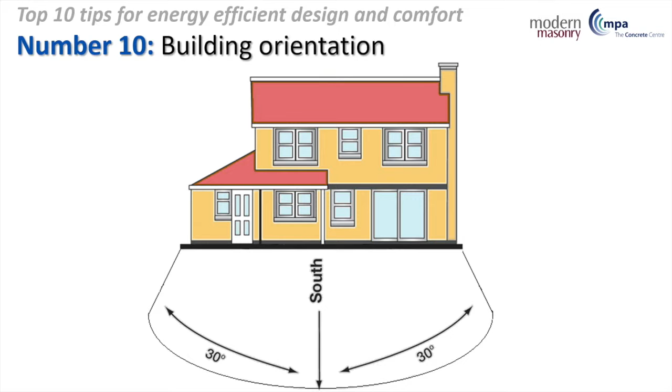Anyway, on to my first point, which is building orientation. It's not something designers, developers and architects are always able to control and influence, but if you can, it makes really good sense to orientate dwellings on a north-south axis. There's a lot of good reasons for doing that, which will become more apparent as I carry on. Essentially, it gives you a really good standard of daylighting, it avoids glare, it provides passive solar gains during the heating season, and it makes shading very straightforward. You'll see why shortly.

So following directly on from that, if we have a north-south orientation, what we want to try and do is have a 2-to-1 ratio in terms of glazed area. So we want roughly twice the amount of glazing on the south elevation than on the north. The reason for that is that on the north elevation, windows actually have a net heat loss over the course of the year. So really you want windows just big enough to meet your daylighting requirements, but nothing more than that. On the south elevation, we want to optimise the glazing to get as much solar gain as we can during the heating season without inadvertently leading to overheating problems in the summer. So on this example of an ordinary detached house, we probably want about 13 metres squared on the south elevation and about half that on the north.

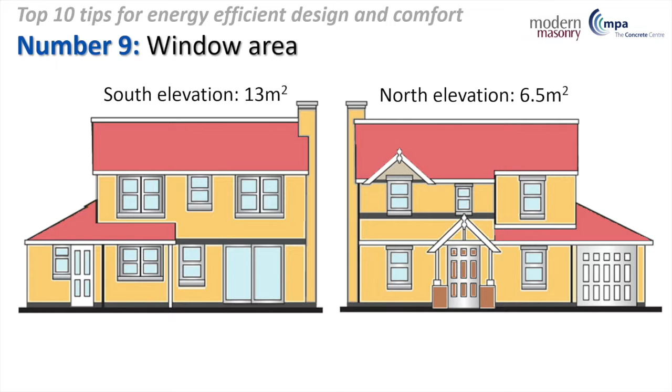Now the other point just to make before I move on is that this is the essence of passive solar design. It's about window design and orientation, and this dwelling has been optimised to take advantage of that, and it looks conventional. So passive solar design doesn't mean you need an unorthodox or unconventional appearance to your building.

You'll see that all of these points are linked, they all work together. So at number 8, we've got solar shading. On our south elevation, shading is very straightforward because we can do it with an overhang, could be a balcony, brise soleil, an awning, or maybe just a deep overhang on the roof for the first floor.

That will keep out the high angle summer sun but won't block the winter sun. So shading's very easy. Now on the east-west elevations, it's a little more tricky. We can't use an overhang, it's not going to keep out the low angle sun in the east in the morning and in the west in the evening, so we're going to have to use shutters or blinds. Actually external shutters is one of the best options you can use, and it's not popular in the UK. You see them used widely in mainland Europe, but not in the UK. I think that's probably set to change in the next few years because we're going to get much tougher legislation on overheating and on ventilation as well in the summer. External shutters are brilliant because not only do they keep the sun out, they provide a means of secure ventilation as well. Depending on the design, they can also reduce heat loss during the heating season if you keep them shut at night. It's always a good idea to have your shading on the outside of the building as well if you can, that's where it's most effective. So, as I say, probably see more external shutters in the UK in the future.

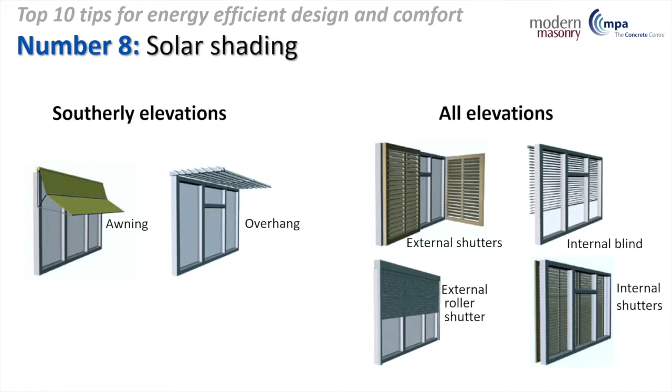Just to make the point about how effective overhangs are at keeping out the summer sun, this is a quick simulation in Google SketchUp, which is a very useful tool because it allows you to look at sun paths and shading. You can specify where in the UK your building is, the orientation, the time of day, the time of year, and see what actually happens.

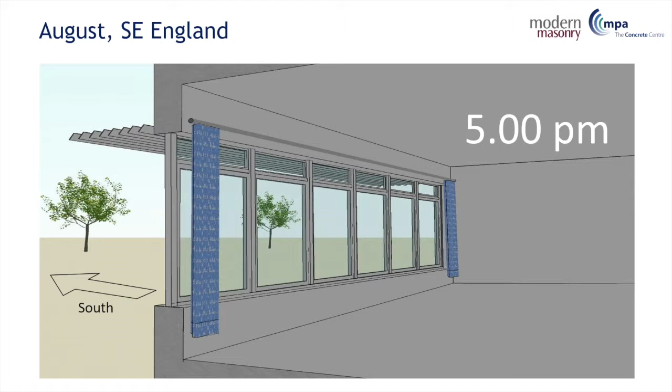So this is a south-facing room with south-facing windows. We've got a brise soleil overhang. It's 7 o'clock in the morning, and as we go through the day, you'll see it's doing a pretty good job of keeping out that high angle summer sun and helping to prevent overheating problems. In a minute I'll show you this model again, but on a day in the heating season.

Okay, number 7 is ventilation, or summertime ventilation. When we talk about ventilation at the moment, it's nearly always in the context of the heating season and trying to have a minimal amount of ventilation. You've got just enough for occupant needs and no more, because you don't want excess heat loss. That's fine, but we don't necessarily give enough attention to summertime ventilation, where we need much larger volumes of air to keep the building cool.

These are just a couple of really effective techniques that you may be familiar with. So we've got cross ventilation, where you've got openings on opposite sides of the building, and the wind can blow directly from one side to the other. You just need to make sure that air path is not obstructed, and you can get very high air change rates with this. It's probably the best option to go for summertime ventilation.

Stack ventilation on the right works when the wind isn't blowing, or maybe in locations where you have low wind speeds, relying on the natural buoyancy of warm air to get air through the building. So the way it works is you've got low-level openings that allow cool air in, particularly at night, so you keep those open at night. That cool air picks up heat inside the building, drawing heat out of the fabric, and as it does so, the temperature of the air increases, it becomes more buoyant, and it rises up to the top of the building. You need to design the building so it can go from one floor to another.

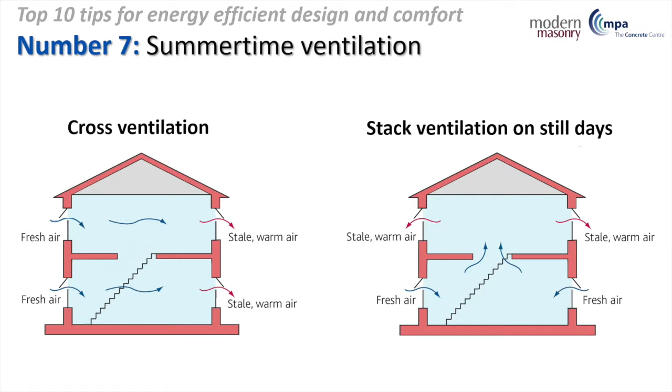So that's all well and good, but one of the issues we're going to have to contend with going forward is security. There's been a very recent change to the SAP overheating assessment, which is the compliance tool for the building regs. In the past, when doing your SAP assessment for overheating, you were able to just assume windows could be left open to get large volumes of air. Can't do that anymore - you have to look at the local environment and do an assessment to see if there's a potential security issue and also a noise issue.

And if there is an issue and you don't do anything about it in terms of ventilation, you have to assume you've only got trickle vents for your summertime ventilation, which of course is not going to work - you'll fail the test straight away. So we're going to have to give a lot more thought to how we provide summertime ventilation.

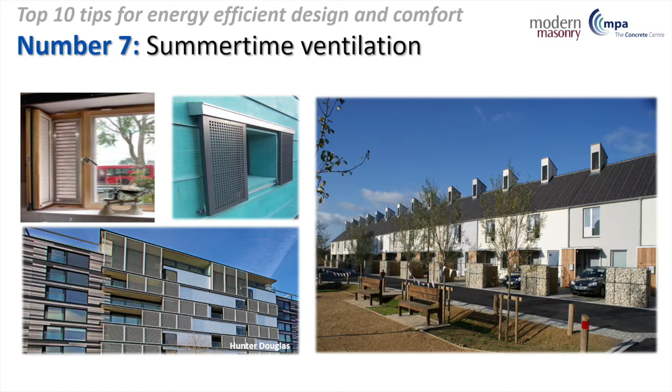Okay, number 6: use of thermal mass. Thermal mass is a property of medium and heavyweight materials, so you'll find it in masonry, concrete, and stone. If you're not familiar with it, it basically describes the ability of these materials to absorb heat, hold onto it, and then release it later in the day. It's a very effective way of helping to prevent overheating in hot conditions, because it soaks up unwanted heat inside the building and helps stabilize the internal temperature.

But you do have to get rid of that accumulated heat, and you do it at night using the cool nighttime air to draw heat back out of the fabric, cooling it down so the next day it's ready once again to provide a lovely radiant cooling effect.

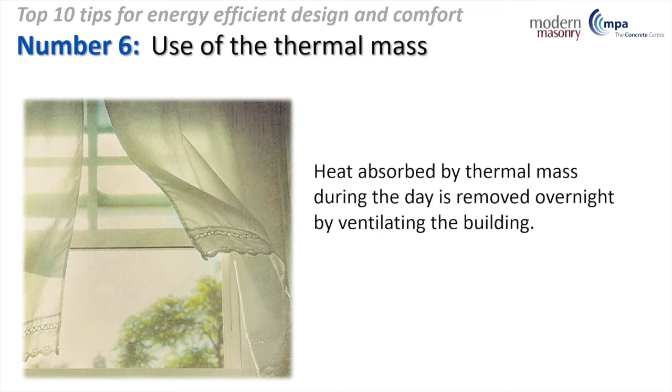So what are the key sources of thermal mass in a dwelling? You can see them in this cutaway. You can have a concrete upper floor as an alternative to a timber upper floor, and I've put on this slide the K values for each of these building elements - briefly, that's the measure of thermal mass used in SAP and SBEM, the compliance tools for Part L. With a concrete upper floor, you've got a K value of between 40 and about 160, depending on the type of floor and finish. Just to put that into context, a timber upper floor will have a K value of about 18 kilojoules per metre squared.

There's lots of thermal mass in blockwork partitions, between about 39 and 111. Similarly in cavity walls, loads of thermal mass in the inner leaf of blockwork, getting up to 190 kilojoules. With timber frame external walls, you've only got the thermal mass of the inner leaf of plasterboard, so you have about 9 kilojoules - quite a bit less.

One thing to mention: people think that if you dry line the walls, that will kill the thermal mass, and it certainly reduces it, but not to the extent you might think. If you actually compare the K value of a dry lined masonry wall with a wet plaster one, it's only about 20% less, so it's not huge.

There's lots of thermal mass in concrete ground floors as well, particularly if you tile them, which not only adds to the thermal mass, but will conduct heat to and from the screed or slab underneath very freely, which is a good property.

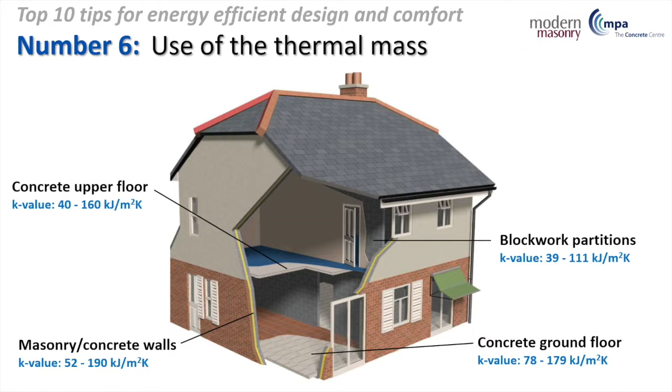So back to that simulation. Same room, but now it's a day in February, so we're in the heating season. It's 8 o'clock in the morning, and the low angle sun is already shining underneath the overhang and onto the side wall there. So if you've got a bit of thermal mass in that wall, it's going to be absorbing the free passive solar gains and holding onto those. And then we'll just go through the day.

And you can see the sun tracks round onto the floor again. If it's a heavyweight floor, it's holding on to some of those solar gains. And then by about 4 o'clock, the sun's gone down and it's all over.

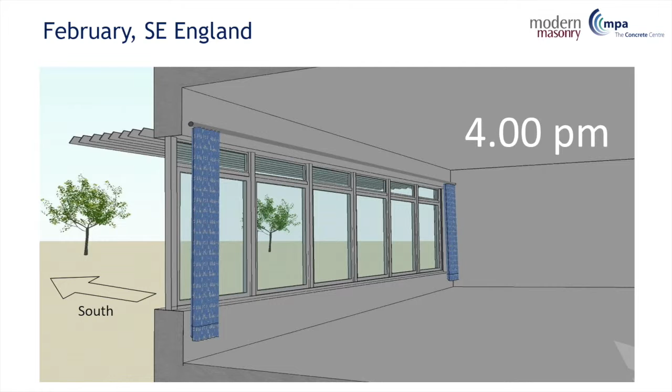And then what happens is the air temperature drops and some of the heat stored in the fabric is re-radiated back into the room. And that can actually reduce the load on your heating system by around 11%. Doesn't sound massive, but over the lifetime of the building, that will add up.

And you have to also remember that it's not really adding anything to the cost of the design. It doesn't require any user interaction. It doesn't require any maintenance. So it's going to be doing this for the life of the building. And if it's a masonry building, I would argue it's going to be around for a very long time.

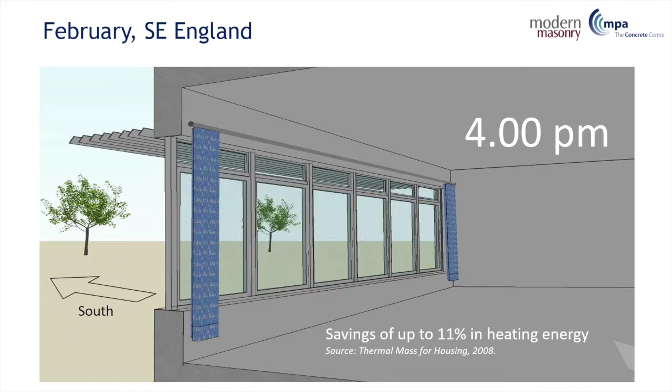Just finally on thermal mass, we often get asked where should it be located, and it's a very easy question to answer because essentially it has to be exposed to the inside of the building. So if you've got a cavity wall, which you can see at the top, that's fine. You've got that inner leaf of blockwork, so that can absorb and release heat gains.

Solid masonry construction in the middle, again, that's fine because it's good practice to put the insulation on the outside of the building, so you've got all the mass of those nice thick blocks. What you don't want to do is to insulate internally if you can avoid that, because it isolates the thermal mass. So from a thermal mass perspective, something like insulated plasterboard is not great.

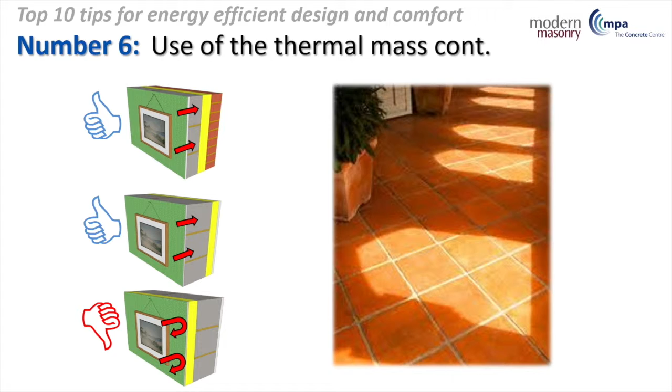Same rule for ground floors. As I said, tiles are brilliant. They will conduct heat to and from the screed and the slab below freely, and also add a little bit of thermal mass as well.

So number 5, efficient heating, and I'm just going to carry on with the theme of ground floors for a moment. You can see here a cutaway of a heavyweight ground floor with a wet underfloor heating system. And in this example, the insulation is underneath the concrete slab. Now that's not particularly conventional, but there's absolutely nothing to stop you doing that.

And if you really want to max out on the thermal mass, that's the place to put it, because you've got all the mass of the slab, the screed, and the tiles. The only downside is you get a very slow response time in terms of heating controls. But that doesn't really matter in reality, because with this arrangement you really want the heating on all the time at very low level, just in the background. That's a very efficient form of heating.

And the reason why it's particularly efficient is because if it's linked to a condensing boiler, so that's supplying your underfloor heating system, it will be able to operate in condensing mode for very long periods of time, which is when it's most efficient. The reason being, without getting too technical, the flow and return temperature to the floor can be about 10 degrees lower than would otherwise be the case in a lightweight floor. And condensing boilers love that, so that 10 degree reduction will improve the performance by about 5%. Again, doesn't sound huge, but over the life of the system that will add up.

But perhaps more importantly, if we're using a heat pump instead of a condensing boiler, which we will be in the future, we're going to be moving over to heat pumps, that 10 degree reduction in flow and return temperature will give you about a 20% uplift in performance of your heat pump. They are very sensitive to flow and return temperature. So I would argue this is a very good arrangement if you want an efficient heating system.

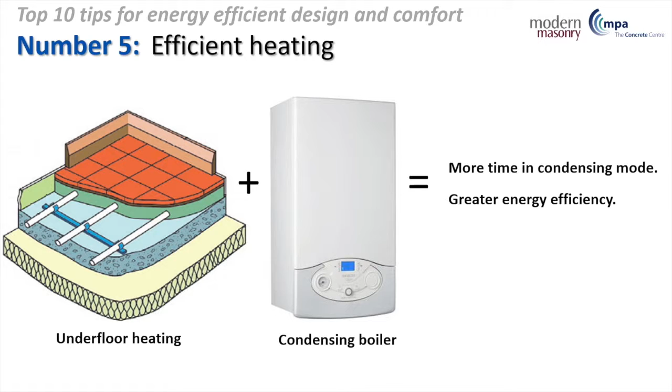Oh, actually, just one other point, just before I move on. The other thing with heat pumps is they're electrically driven. We're all getting smart meters now. We're going to get real-time energy pricing in homes, and soon we'll be able to switch on the heat pump when electricity is cheap, store the heat in the floor, take advantage of that later, so we'll save on our heating bills, and we'll also be doing the whole of the UK a good service because we'll be making greater use of renewable energy when it's abundant, because we can use it when we don't actually need it and store it in the floor.

Okay, number 4, airtight construction. Goes without saying, we don't want too many gaps and cracks in our homes and buildings.

The thing I want to say about this is that in 2006 we had to start pressure testing new homes. It came into the building regs then, so it was mandatory. And what we found initially was that timber frame homes were performing slightly better than masonry homes.

And the reason for that was that they have a vapour barrier, which also, as it turned out, acted quite well as an air barrier. However, since then we've learnt lessons on how to design masonry homes and build them as well to ensure they're airtight, and today they're as airtight as any other form of construction, so it's not an issue anymore. And in fact, if you look at NHBC pressure testing statistics, it's masonry homes that are the most airtight, which is quite interesting.

Now, one other thing to mention on airtightness is it's all very well passing the test when the building's new, but you do need to maintain airtightness over the life of the building. And the NHBC Foundation did some research a few years ago to see how well new homes performed when they were sort of 4 or 5 years old.

So they went back and retested them, compared the results with the original pressure testing results. It was a fairly small sample, but what they found was it was the masonry homes that were maintaining a high standard of airtightness. It wasn't degrading as rapidly as the other methods of construction. So that was good news.

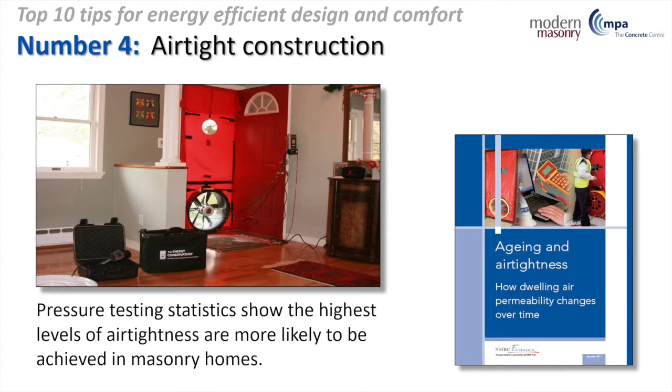And I mentioned wet plaster finishes earlier, great for thermal mass, also brilliant as an air barrier, very effective, very robust, and the brilliant thing about it as well is that unlike other air barriers, you can actually see it, so if it becomes damaged, you can repair it. So it'll maintain its integrity over the life of the building.

Okay, number 3, minimising thermal bridging. Of course, the thermal bridge is anything that crosses or spans your layer of insulation and is a source of heat loss. And if you look at the SAP assessment tool, there's a little box you can tick for the default thermal bridging value.

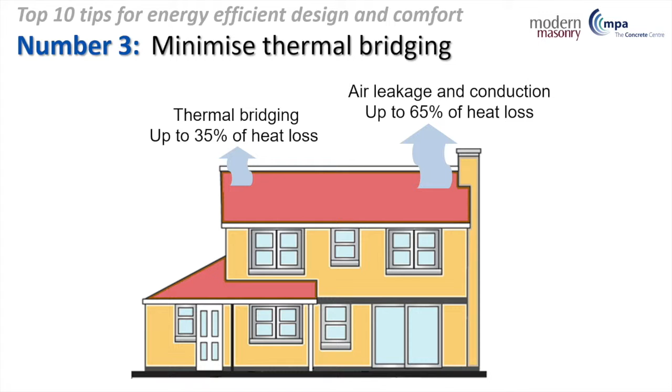This is a very tempting thing to do because then you can just move on, it saves time. But you'll pay a very high price for that because SAP will assume up to 35% of the heat loss from your dwelling comes from thermal bridging. So much better to take a little bit of time and trouble to specify the individual thermal bridges, and you'll get a much better result.

And the masonry sector has produced a comprehensive set of high-performance construction details which are free to download and use. We've got details for aggregate blocks, get those from the CBA website. Details for aircrete blocks, get those from the Constructive Details website. Or alternatively, you can just go to the LABC website and you'll find all of them there, not only for cavity wall construction, but also for solid masonry. So I do recommend, if you're building in masonry, you use those.

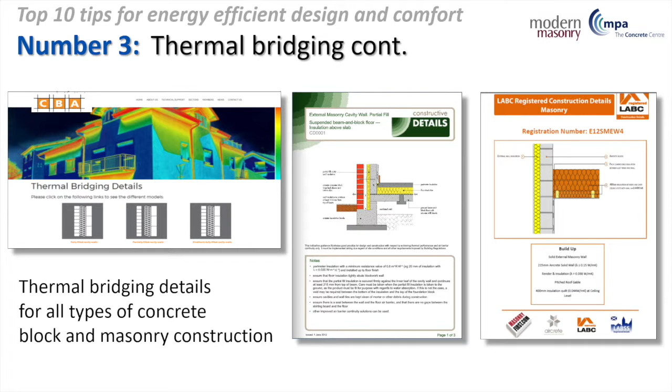It's a very cost-effective way of maximising thermal efficiency. And if you do, you'll go from about 35% with that default thermal bridging value down to about 14. So it's a bit of a no-brainer, really.

And we've also got loads of relatively new high-performance ancillary products for masonry construction that reduce thermal bridging. So we've got insulated cavity closers made from plastic with a polystyrene core. You just cut them to size and they slot together, very easy to use. And they'll take the weight of a triple glazed window unit, which you can sit on the cavity closer, which is, from a thermal efficiency point of view, the best place to put it.

We've got high performance lintels from companies like Keystone, give you very low Psi values. We've got high performance wall ties now, and you can see both of these examples on the Ancon stand, which is just over there behind you. And they produce basalt fibre ties, which is the black one at the bottom. They're made from the basalt mineral mixed with an epoxy resin, and they essentially don't conduct any heat at all. You don't even have to enter their details in your U-value calculation. They're that good.

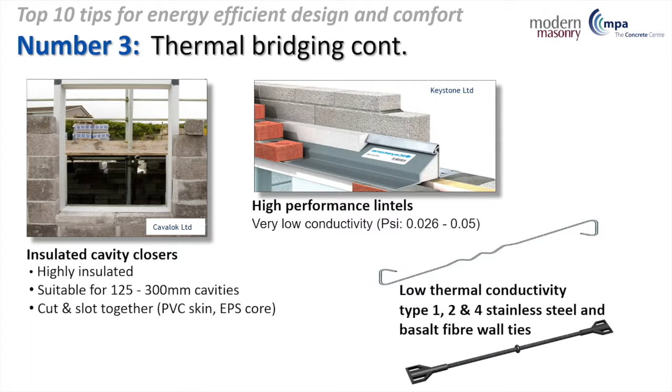You pay a little bit of a premium for those, but you can still use wire ties like the one shown there. The only thing I'd say is we've got really good ones now for larger cavities. So for 150mm cavities, you can now get a Type 4 wall tie, and the significance is that a Type 4 tie is very thin and conducts virtually no heat. Couldn't get those a few years ago - you'd have had to use a really thick, chunky tie that would have lost you loads of heat. Not the case anymore.

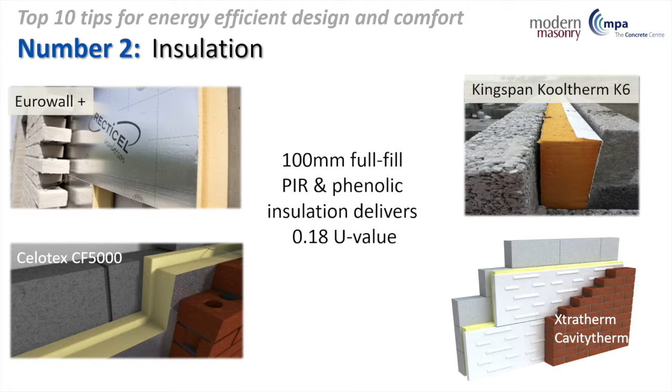Number 2, insulation - the more the better, of course. What I want to say about insulation in respect of masonry construction is that a few years ago it was thought you might need walls half a metre thick to get the U values required for zero carbon homes. Hasn't turned out to be the case at all. We've had really high performance insulation products come onto the market that will give you a U value of about 0.18, which is excellent, good enough for Part L, in a standard 100mm cavity. So no need for really wide cavities if you don't want them. You do pay a bit more for these, but you can get the same performance with more conventional options, albeit in a wider cavity of 150mm - that could be partial fill or full fill mineral wool insulation, which is the cheapest option of all.

Just before I move on, I want to mention beam and polystyrene block ground floors, which are very popular these days. This is where you use polystyrene blocks to infill between your concrete beams instead of concrete blocks. They provide insulation, but also reduce the overall floor depth, so you don't have to remove so much soil from site. There are products available now that can give you fantastically low U values of 0.09, way better than you need for Part L. I just wanted to make you aware of that.

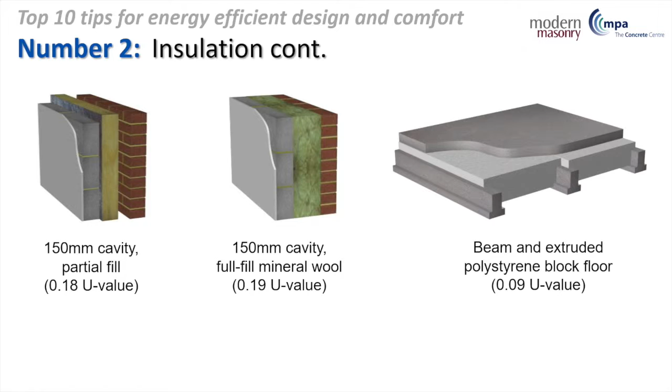At number 1, perhaps controversially, but I think the most important thing is to make sure the home is resilient and durable, because there's no point maximising fabric energy efficiency if the home itself isn't fundamentally durable. By resilient, I mean resilient to the effects of climate change - overheating, which I spoke about, and effects of flooding, so you need flood resilient materials. Durable - masonry and concrete is extremely durable. It also protects the thermal performance in that the insulation in the cavity is well protected. I mentioned wet plaster as your air barrier - very robust, and as I said, you can fix it easily. So I think this should be number 1: make sure buildings are durable, and people don't really talk about that much at the moment. I wanted to bring that to your attention.

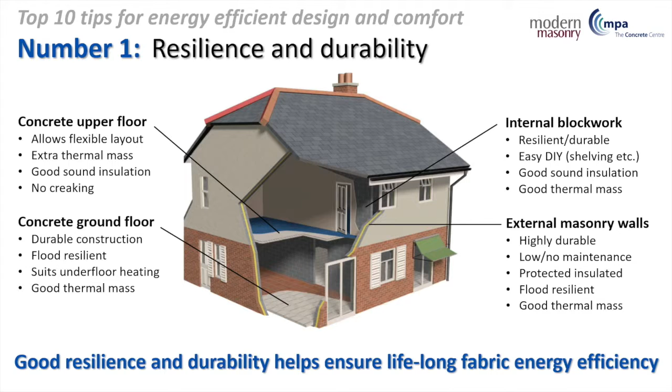I think I've still got a few minutes, so I wanted to go back to a point I raised earlier and go into a bit more detail, which is summertime ventilation and this new requirement to think about acoustics and security issues. I mentioned security, and I was going to talk a little about acoustics - I've borrowed a few slides from a CIBSE webinar I saw last year, which was really useful, by a chap called Jack Harvie-Clark and Anthony Chilton. Basically they were talking about a new assessment methodology for considering acoustic performance in the overheating condition.

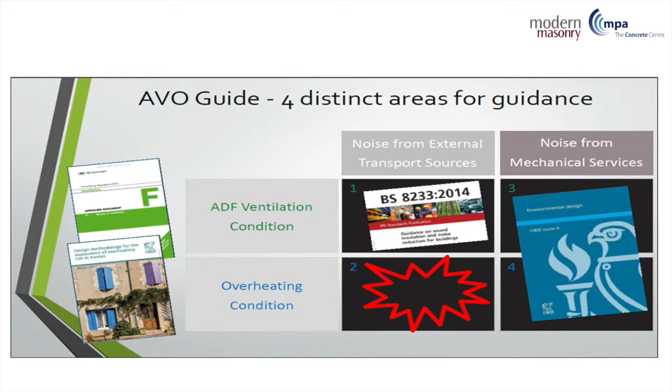What I mean is they've identified there's plenty of guidance on dealing with acoustics from mechanical services - CIBSE published guidance on that. There's a British standard on dealing with acoustics through facades, but there's nothing on dealing with acoustics where you've got windows that are open, so in the overheating condition. So they've come up with a very simple 2-step test you can apply, and I'll just take you through it - a 2-level assessment procedure.

Level 1, what you have to do is go to site and do a sound level assessment both during the day and at night. Come up with your average values, and then knock off from those values 12 decibels, which represents the difference between the outside noise level and the inside when you've got a window that's wide open.

So it's sort of a worst case scenario. And if in that worst case scenario you still come in under 50 dB during the day, 43 at night, then you've passed the level 1 assessment and you don't need to do any more. You can just ventilate your building with windows that are open, assuming, of course, you haven't got a security issue.

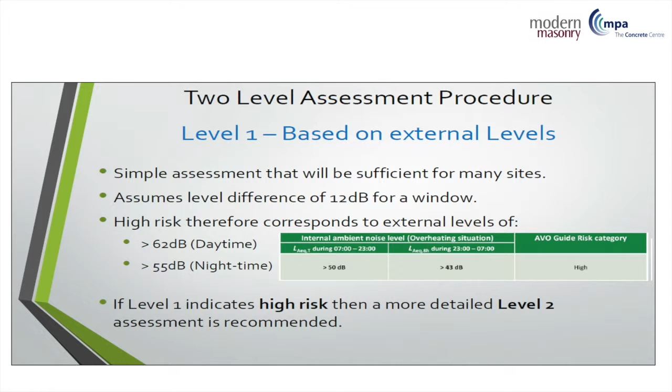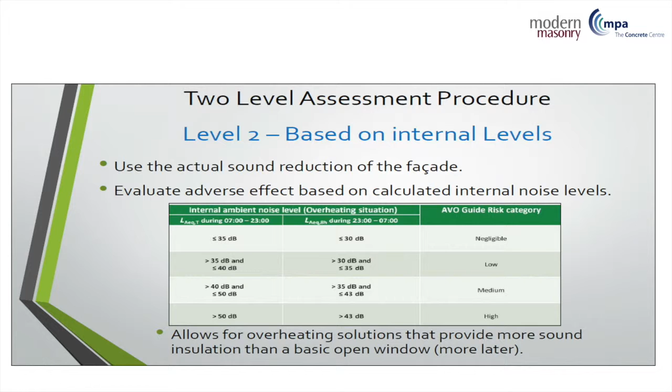If you fail it, then you've got to go into a bit more effort with your design. On this table, you can see that high level again at the bottom, the 43 and the 50 dB, and then you've got the other levels for medium, low, and negligible. Now, we've already established that the open window is not going to work, so we've got to think about using some other approach, and here are some options.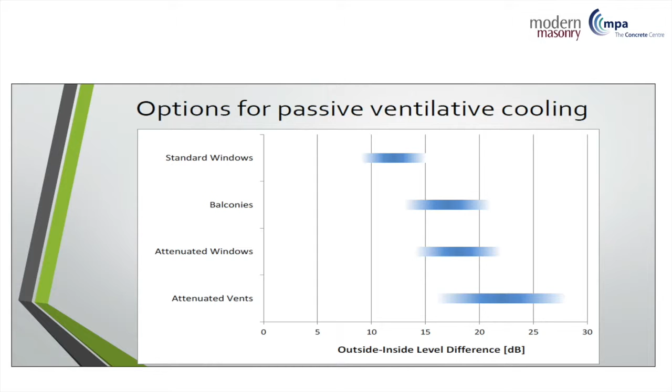At the top, you can see your standard open window and the 12 dB reduction. Then we've got things like balconies—acoustic balconies will give you a greater sound reduction. Attenuated windows and attenuated vents are the best of all, so you might want to apply one of those. This is what they look like: attenuated windows and vents basically provide an indirect path for the air and for the sound as well.

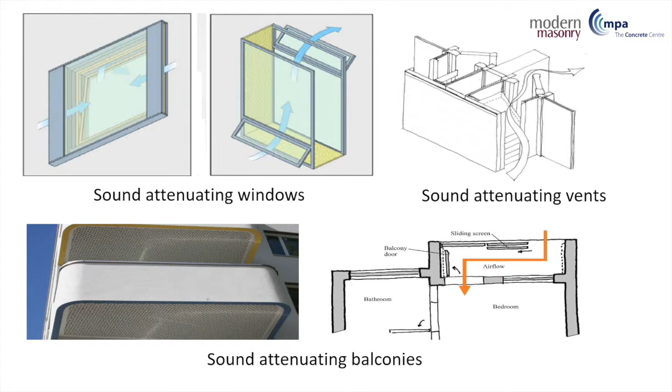Here's a very quick case study just to finish off. This is St John's Hill in Clapham, a residential development. They did this assessment on the development, and what they found was with the level 1 assessment they failed it at night. So with an open window, it wasn't enough—we still got 48 dBA inside the building, which is higher than the 43 dBA limit. So open all windows, no good.

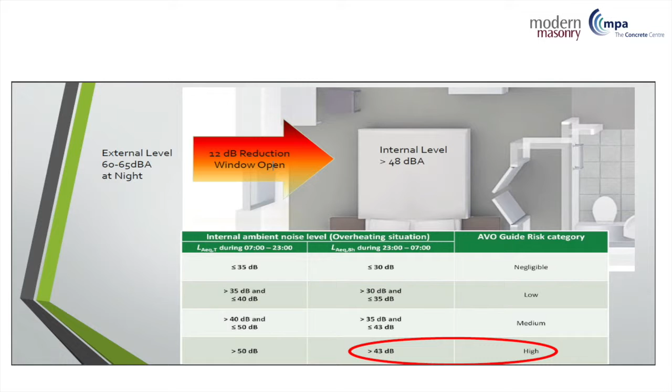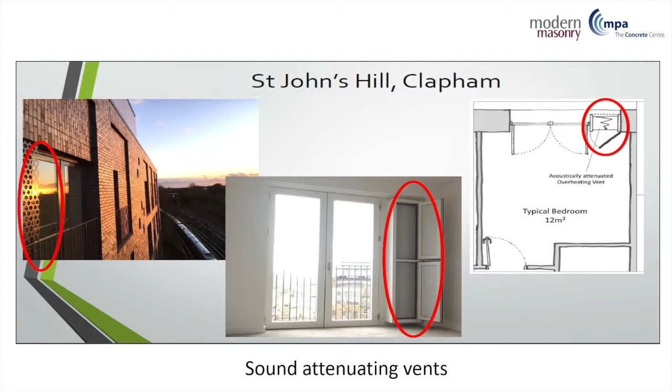So what they did was they decided on attenuating vents in the end, and you can see a couple of photos there of the final solution. And with those, with the level 2 assessment, we passed that, because instead of the 12 dBA reduction with the open windows, we've got a 24 to 27 dBA reduction. So we're now in the medium risk zone, and that's okay, as long as we're not in the high risk zone.